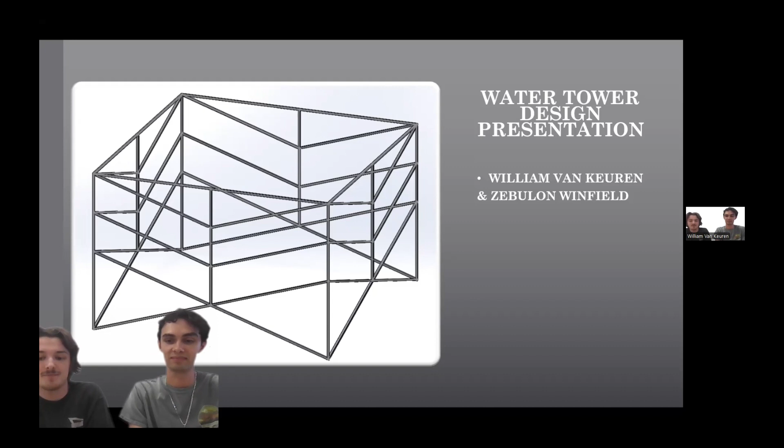So much of America struggles with water scarcity, especially in areas with few above ground water sources like lakes and rivers. More rural places that have acres of farmland are heavily dependent on external water supply for the integrity of their infrastructure. However, if the towns should endure something like a crisis in water supply, there's not a lot of places that would be prepared to be self-sufficient.

One such town is Magdalena, a small town in central New Mexico. And Magdalena had a terrible water crisis in 2013 due to drought that led to water relief efforts being made. This is hugely expensive for the government. And as climate gets less and less predictable, and the government spends more and more on relief efforts elsewhere due to hurricanes and other natural disasters, small towns may be left to fend for themselves during times of crisis.

Additionally, Magdalena competes with nearby farmland for groundwater supply, meaning the town will take second priority in times of crisis. For this reason, we believe Magdalena would benefit from a water tower that could support the population in times of shortage.

We decided that the town of Magdalena would be a good spot because it has a large mountainous region to the south. It's the Cibola National Forest. But even though it's a national forest, there is a part of these hilly forests that exists inside of the county limits, allowing for building permits to be secured. The water tower could be built in these hills, so the extra elevation could aid in the distribution system of the water to the town.

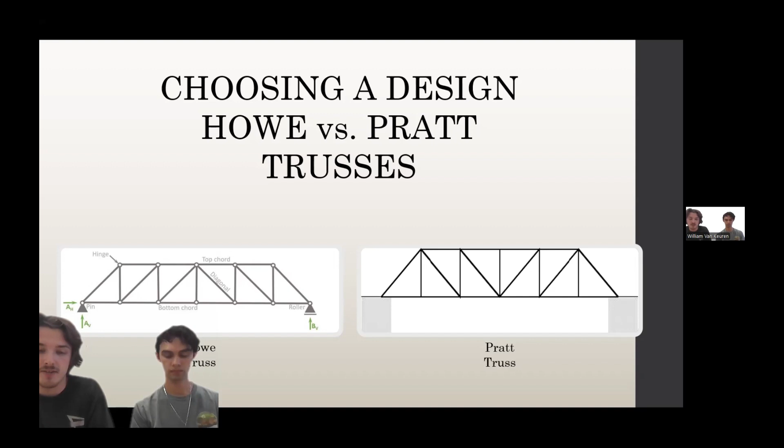The water tower itself had to be very wide because the area does not get a lot of rain, with only 9.4 inches a year. The tower must also hold enough to allow the use of 200 gallons a day from the town, with the constraints of a maximum radius of 45 feet. We decided to go with that maximum 45 feet and a height of 6.167 feet to hold enough water to be 200 gallons a day or 276,000 liters a year.

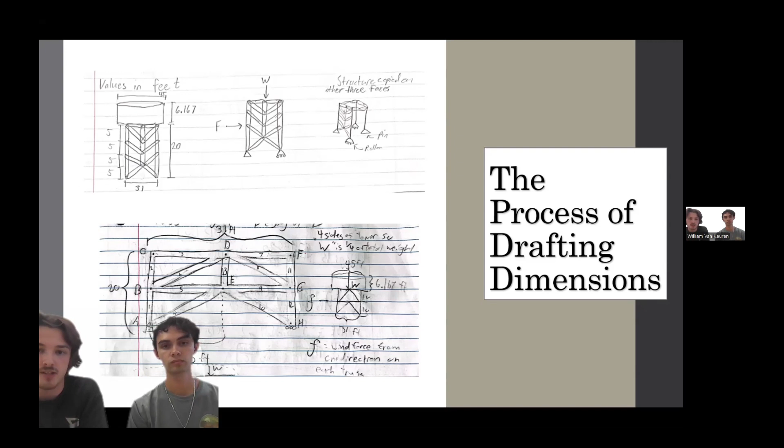Rainwater alone in this climate would not be enough to support this criteria, but we made the tank tall enough that it could support the 200 gallons a day if water were to be shipped to it. So it could hold that 276,000 liters. We didn't want to make it any taller than necessary to hold that minimum because it would add extra weight to the tower, especially full, which we were worried our truss may not be able to support.

And for the hand calculations, we used the method of joints in both designs. We first found the support reactions for a pin and a roller. A pin and a roller are used so that it is statically solvable. If we use two pins, it would not be. And additionally, that would create a lot of stress inside the structure without it being able to move.

So we found the restraints, calculated the equations for each individual member in terms of W and F for the weight and force respectively. Then those equations were plugged into Excel with the values for W and F at the average wind speed and full tank, average and half tank, double speed, half tank, double speed, full tank.

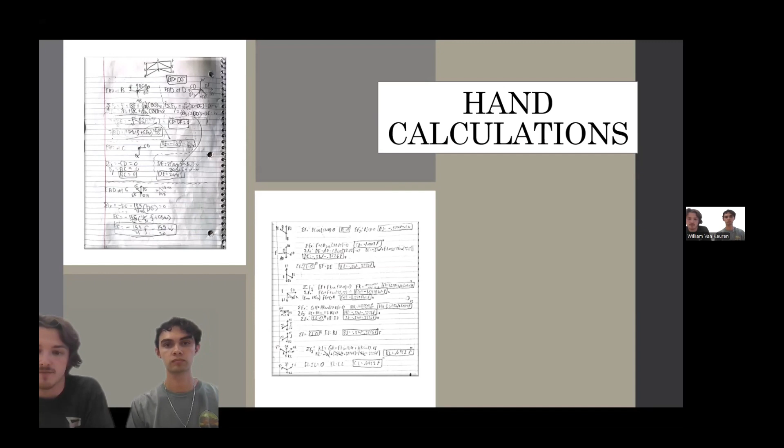So the designs were both created in SolidWorks in 2D using weldment tools and static analysis to simulate the load and restraints. All joints were restrained on the Z-axis to simulate a 2D truss and to prevent deformation or forces acting in any direction other than the X and Y axis. Then different simulations were run with the same variables used in the hand calculation section, and the results were put into Excel with the hand calculations. Finally, a percent error was calculated to measure the efficiency of both methods.

The largest drawback of this method using 2D is that it simulates the perfect condition of a centralized point load instead of a distributed one. So a more realistic analysis couldn't be conducted. This was what the 3D design could help fix.

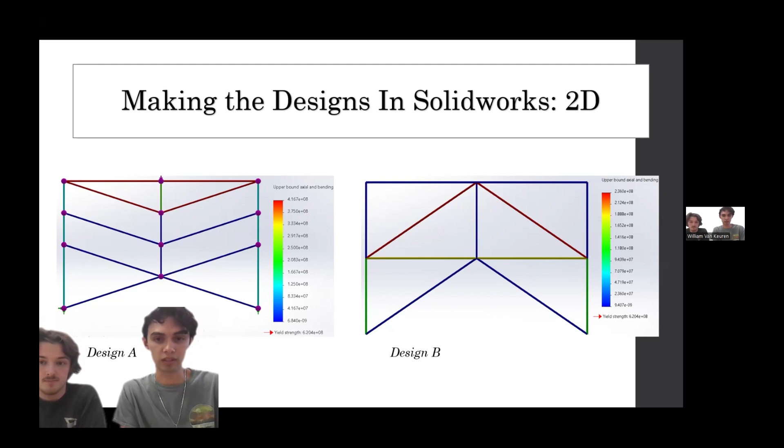This was not a decision made lightly, as many hours of troubleshooting were spent exhausting every single option, every YouTube tutorial, professor suggestion, and AI recommendation before it was simply decided to only include the 2D design in the project. This has the drawback of disallowing a more accurate analysis with simulated distributed loads that show the actual stress and deformation of both structures to draw more accurate conclusions. Instead, an inference on the stronger structure would have to be made based on the 2D analysis.

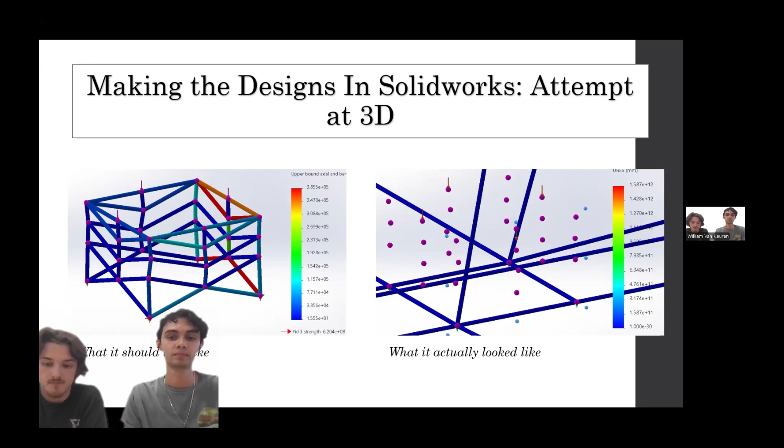And now to shift into the winning design. So if a 3D analysis of both structures could be obtained, it would have been the main method of choosing the better structure, where the choice would be based on effective distribution of loads, the highest force experienced by any one member, the least deformation, and the price of the overall materials. The 3D approach could then be used to determine the best type and size of truss as well.

But because we do not have the 3D analysis, the same criteria, the distributed loads and force, etc., would be applied, but using the 2D models. So it's harder to decide on the shape and size of the trusses themselves, but we could research that online instead. Based on this criteria, truss B would be chosen. This actually disproves our initial hypothesis because truss B was the Howe truss.

As the load at the center joint was better spread between 5 joints rather than the 3 joints of truss A. This leads to a more even distribution, and a smaller deformation, with 110 millimeters in design A as the maximum deformation and 43.5 millimeters, which is less than half the deformation, in design B, and that's at the maximum weight and wind speed.

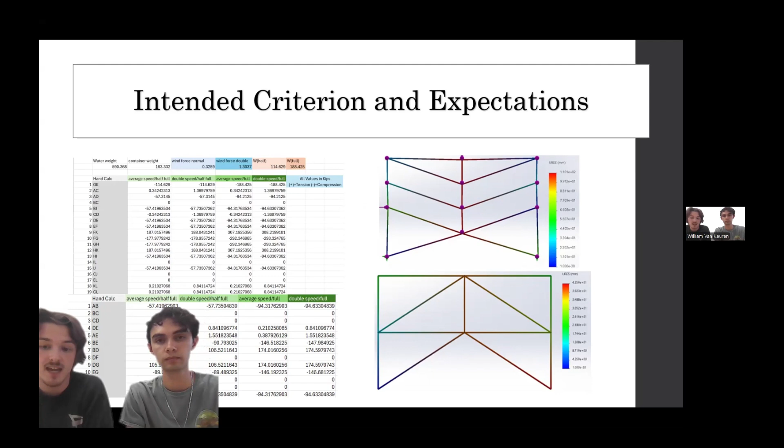However, the actual design process was a little different. Only one structure, structure A, was completed in time with the SolidWorks simulations, hand calculations, and percent error calculations before the due date with enough time to complete the remaining tasks. So it was chosen by default. If both structures were completed, structure B would have been chosen as outlined due to pretty much every mode of the criteria for selection: the improved load distribution, smaller maximum force experienced by any one member, less deformation, and less

materials used overall. And although some might see it as a bad thing, we see it as a valuable lesson that can be applied to all real-world project management. Whenever an idea, product, project, or otherwise is being pitched to a buyer, it doesn't matter how good it is if it isn't available by the deadline. With that being said, we're now going to get into implementing the actual design.

So the two choices made going from the initial design to the final selected design were the types of restraints and the size of the truss, where the thickness of the tank had already been calculated to find the weight of the tank for calculations. It was decided to put only one roller joint instead of two diagonal from each other. Having two diagonal from each other would make it more accurate to the 2D design because each face would have one roller and one pin.

But with one roller and three pins, it allows for more capacity for horizontal restraining, while still allowing the truss structure to bend and flex as temperatures and loads change. We think this middle ground gives us the best restraining capabilities while also stopping any possible collapses due to internal stress caused by too much restraint.

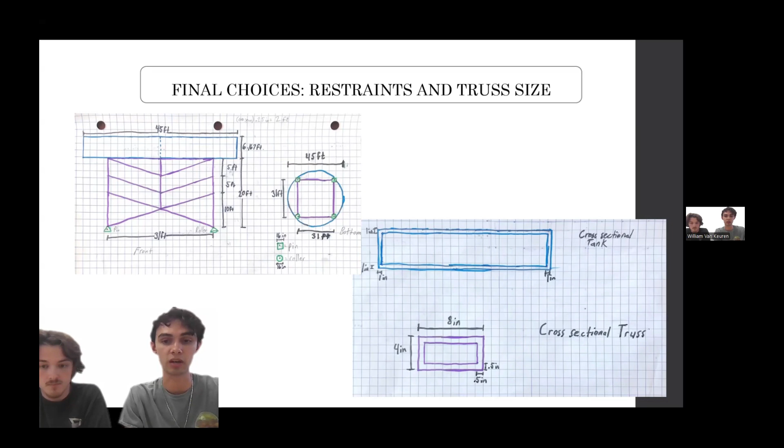The truss shape and size was decided earlier in design when attempting to create a 3D model after some research, when it was found that a rectangular tube would be most effective with a large vertical load, and the 8 by 4 by 0.5 inch tube pricing was very researchable and affordable, both necessary for the bill of materials, while also being large and thick enough to support the structure. This was only decided through research, though, because further analysis could not be conducted through the 3D SolidWorks analysis.

All numbers are averages from various construction websites and the use of conversion equations with amounts roughly estimated from the assembly instructions and detailed drawing. For this, the steel price is the approximated price of steel for the tank based on our measurements. This does not take into account the price of manufacturing the tank, nor does the man-hours section include manufacturing the tank. So the steel price represents the price of the tank as a whole, which is why a price of $0.33 per pound was used, which may be a high estimate for the bulk construction price of steel for a large construction firm to account for production costs. For that reason, estimates might be low.

Other estimates include that a 6-man construction crew could complete the job in 1 work week. The welder could complete his task in 2 work days, and we would only need the crane and crane operator for 2 work days.

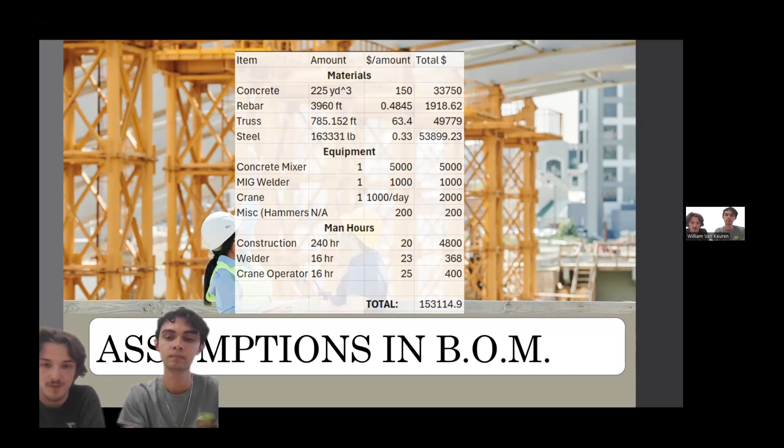So after this project, there were some key takeaways on what we could do differently for future projects or the same project done again. The first and most obvious is time management. If we had 2 completed trusses to choose from in the design selection, it would have improved our final product. Next is the 3D modeling.

Although ideally it would be nice to have a fully functional 3D design for a future project or this project, if unforeseen hiccups happen like they did in this project, it could still be beneficial to investigate how the different truss sizes affect the stress, because it seemed that the stress analysis was still functional for the 3D SolidWorks design. Although this couldn't be taken with as much authority as a fully working 3D model might be, the partial 3D design would still help in choosing a final product, as it would show what the stresses would be with a distributed load in a more realistic environment with all 4

faces. Finally, choosing a location that gets more rain would be an easier task for water tower production, because the current location made us choose a very wide design, which created a lot more stress on each individual member. And that could be circumvented if a taller tower could be made in an area with more rain. Realistically, if an above ground water source was to be created for Magdalena, it could be created without any truss, just in the mountains because of the elevation above the town. So with that, that concludes our report.